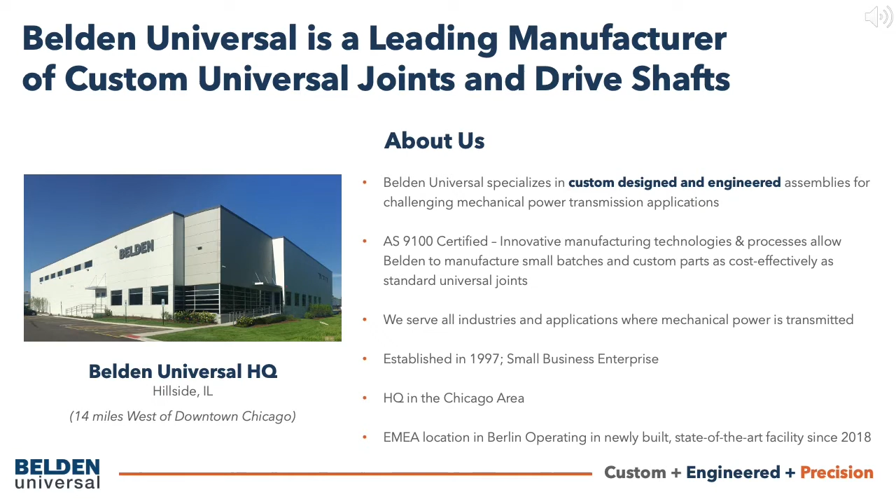Starting with the basics, what is a universal joint and why should you use this type of coupling? Universal joints are a type of shaft coupling used to transmit torque and motion between shafts with misalignment. Ideally, input and output shafts should be perfectly aligned. In practice, displacement during operation, for example due to a technical restriction or vibration, is often unavoidable.

These misalignments can be overcome with a well-selected universal joint or driveshaft. Universal joints can be found between motors and end effectors or gearboxes where other couplings are not an option, or where the characteristics of couplings alone do not suffice due to angular or parallel misalignment or other demanding operating conditions.

Let's examine the different power transmission conditions that would require a universal joint. If angular misalignment is greater than 5 degrees, a universal joint may be the only viable coupling option. This can be the case if the motor cannot be installed very precisely, or if the motor moves during operation or after installation. Sometimes the motor has to be placed at a higher angle to the outbound shaft due to other factors.

Single joints can operate at up to 45 degrees, and double joints and telescoping driveshafts can operate at up to 90 degrees. Parallel misalignment often requires a double joint or a telescoping driveshaft. As an example, sometimes the motor cannot be added in line with the outgoing shaft because there is no room, so it is plugged underneath or above the direct line of the shaft.

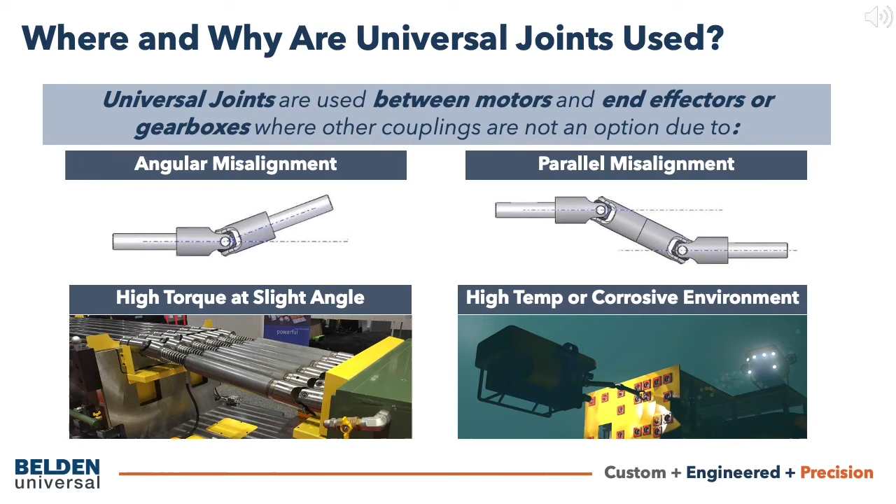Universal joints usually consist of two yokes, also known as forks, and a central cross-shaped element. When a cross is used, there are typically roller bearings or bushings required to install the cross. If the cross is built from a block and pins, there are ways to avoid bearings or bushings, but they can be added as well.

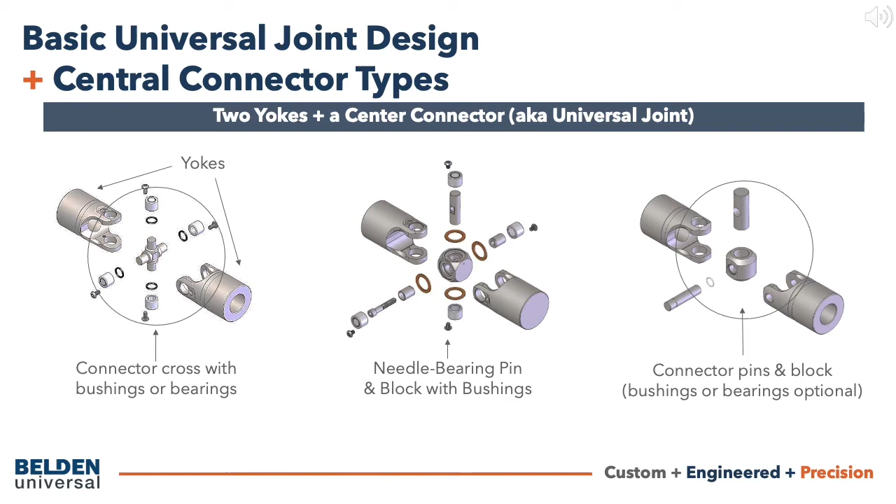A cross and roller bearing design is shown on the left. You can see a pin and block design on the right. There are also ways to add roller bearings and bushings to a pin and block design, as shown in the middle of your screen. The contact surfaces between the yokes and the central connector are what transmit the torque and motion, and therefore must carry considerable loads.

The design and type of connection in these spots are critical for optimizing the performance of a universal joint. These spots are called bearings. There are two major types of bearings for a joint: plain bearings, also called friction bearings or bushings, and needle bearings, also called low friction bearings.

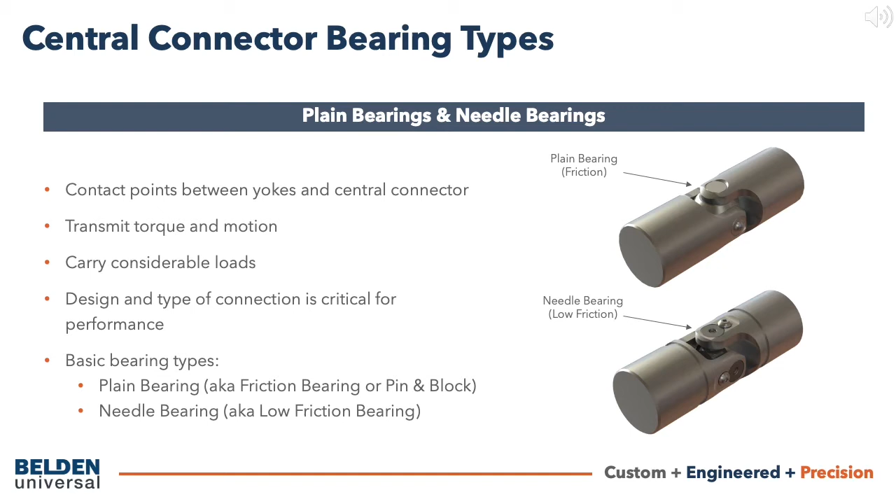Both plain bearing and needle bearing designs have their advantages. Plain bearings are usually simple, cost efficient, and can carry relatively high loads at low bearing speeds. However, they tend to be more difficult to lubricate, and heat generated by the friction can be a problem down the road due to wear or galling. Plain bearings can be adapted to the application by the materials used, such as alloys, stainless steel, and a combination of harder and softer materials like brass, bronze, or PTFE coatings.

The needle bearing design generates less heat and therefore can operate at a higher RPM, but at lower loads. They can also be sealed and permanently lubricated.

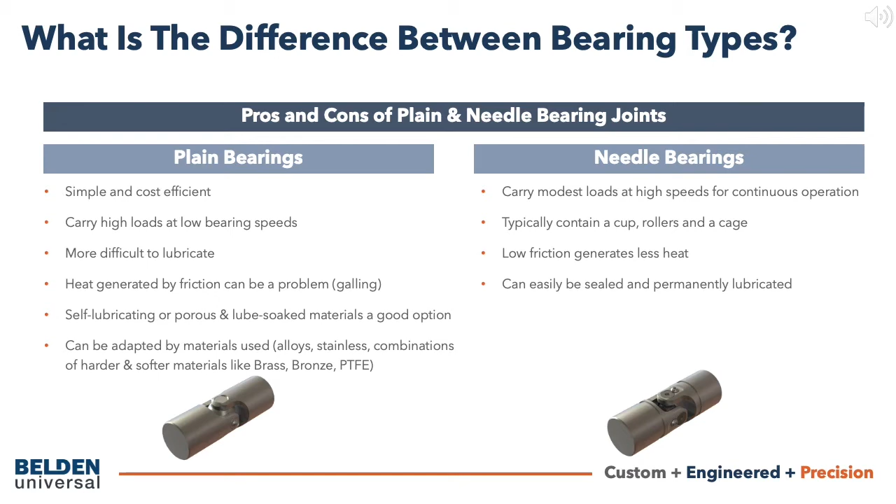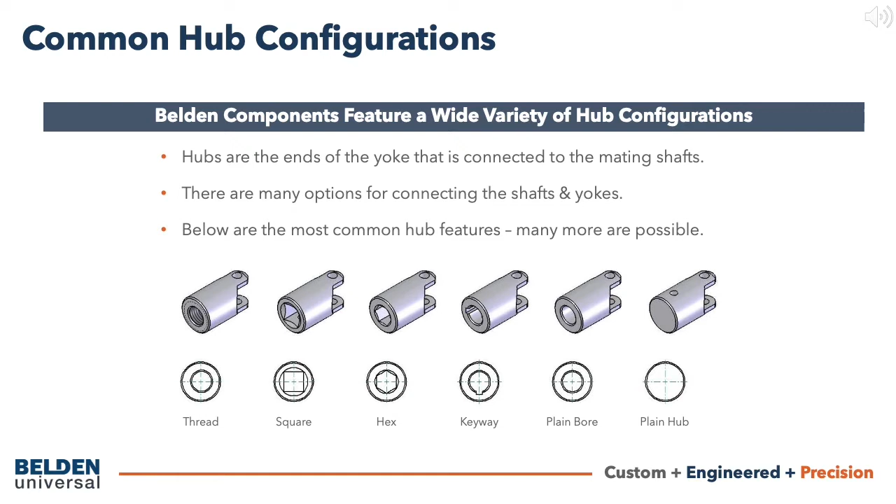Once you've identified the best bearing design needed for your application, there are many options to choose from for connecting the shafts to the yoke of the joint. The ends of the yoke that connect to the shaft are usually referred to as hubs. Some of the most common hub features are shown here, but there are many other variations and additions possible according to each application requirement. The next two slides show some of the specialized hubs we have created to meet customer needs over the last few years.

The assemblies you see on the top left and top right offer female bores with a spline on the outside hub. The top left assembly features a male shaft on one end and has been turned down to a smaller diameter, while the other end is a flange connection. This assembly was used to steer an unmanned robotic transport vehicle.

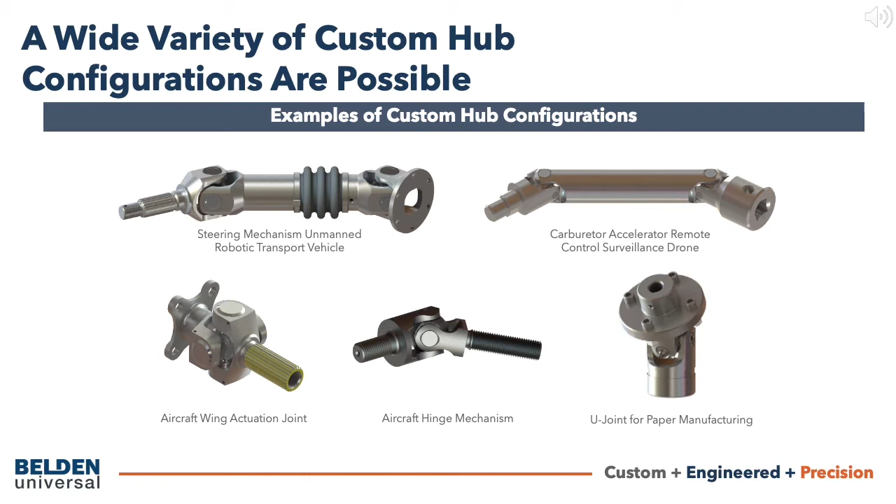The assembly on the bottom left is a joint used in aircraft high-lift actuation systems. The assembly you see on the bottom right is used in paper manufacturing machinery.

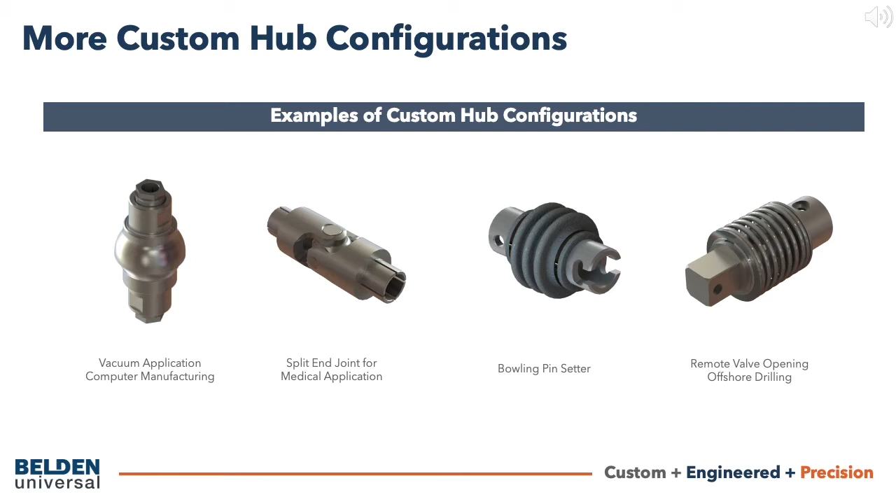Universal joints can be constructed as single universal joints or double universal joints. Different design subcategories include heavy-duty, high-strength, leveler, stainless steel, needle-bearing, and military standard or mil-spec. These base designs can be customized to meet the customer's specific coupling needs.

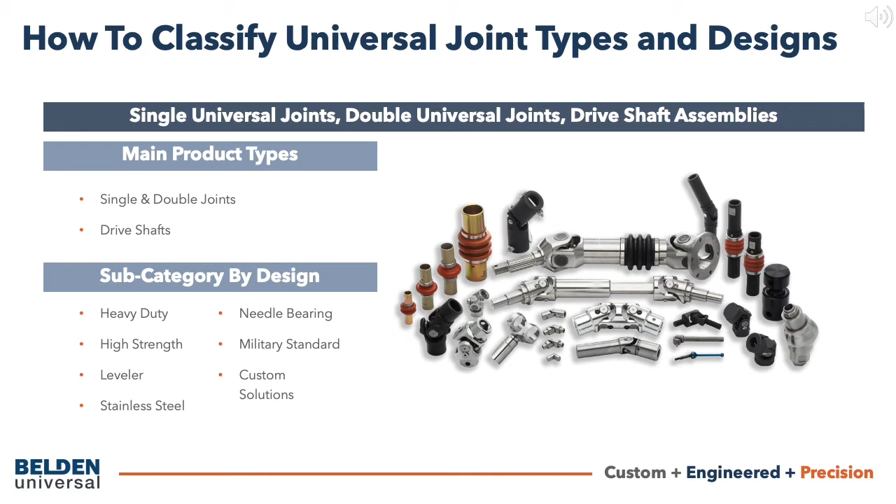Let's start with the different joint designs available for single universal joints. Single U-joints can compensate for angular misalignment of up to 45 degrees, depending on the size. They're available as needle-bearing or friction-bearing joints in any one of our friction-bearing design types: heavy-duty, high-strength, and leveler strength. All designs are available in our standard alloy steel, as well as a range of stainless and other materials. We will take a deeper look at the material options in another segment.

There are a range of standard hub configurations that we offer, but we can also provide custom hub modifications. Now, let's look at each of the base designs.

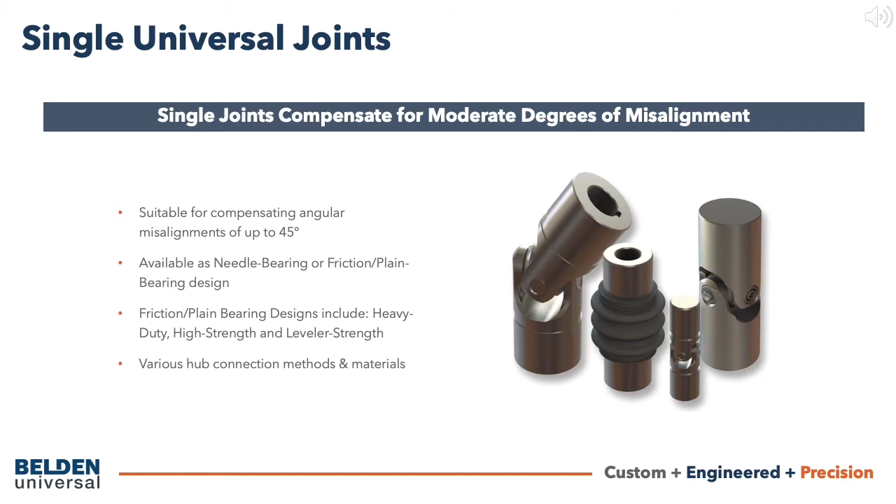Our first joint design is a heavy-duty joint. Heavy-duty joints are high-quality joints used for a variety of standard applications with moderate loads and RPM. They're constructed with a block, a large pin, and a small pin that is secured in place with a snap ring. Smaller joints in this design have the pins pinned in place rather than using a snap ring. They are made from high-grade alloy steel and have hardened and ground blocks, pins, and yoke ears. The hardening increases the strength of the components, but even more importantly, improves the bearing properties of the components at their contact faces.

Turning these into formidable friction bearings. This design is easy to assemble and can be disassembled.

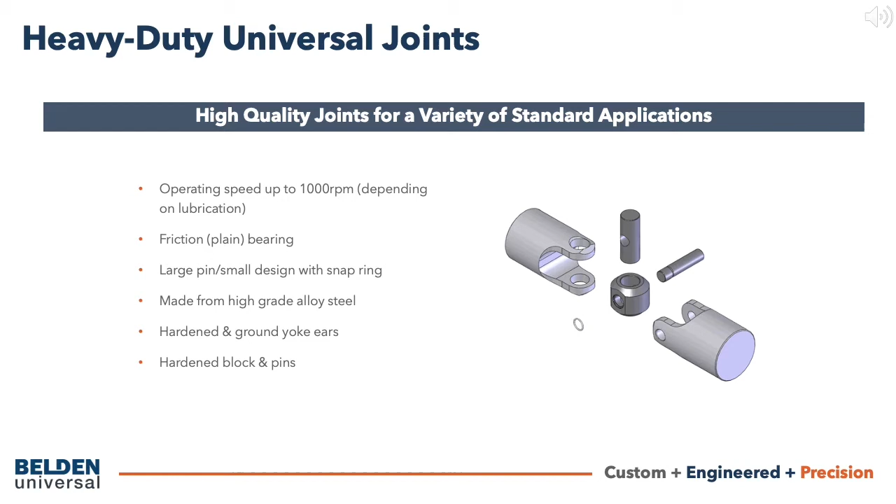High-strength universal joints are used for higher torque applications. They are also friction-bearing joints made from high-grade alloy steel. In this design, they feature a short pin, long pin construction, then are secured with a rivet.

The short pin and long pin design has the advantage of having the same size diameter pins for both axes, making them stronger, since the large pin small pin design typically ends up with an oversized large pin and an undersized small pin.

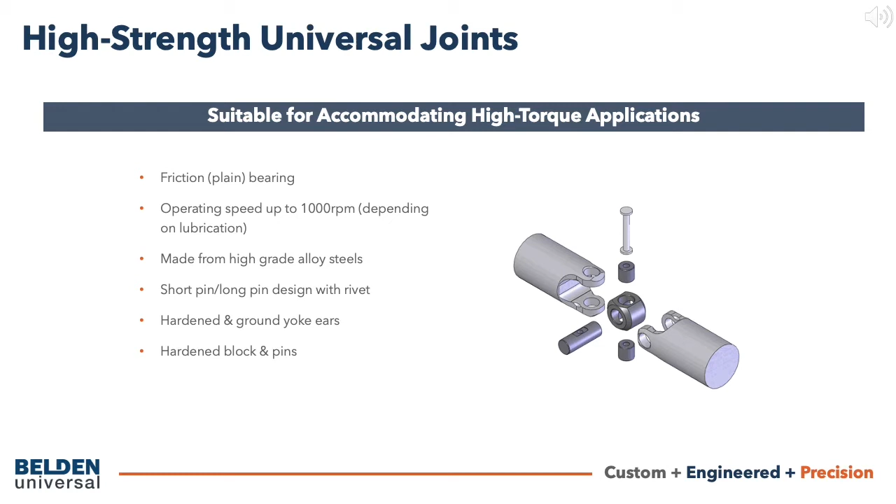Blocks and pins, as well as the yoke ears, are also hardened and ground as on the heavy-duty series.

Leveler-style joints are designed for extreme torque applications, often seen in steel leveling and metal processing equipment. Similar to the high-strength joint design, they feature a friction-bearing construction of the short pin and long pin secured with a rivet. Blocks and pins, as well as the yoke ears, are also hardened and ground.

The leveler design offers a reinforced yoke profile, making it our strongest design available, although in some cases this reduces the angle of operation. Additionally, a dry lubricant coating is added to the contact faces of the joint to assist the lubrication, or lack thereof.

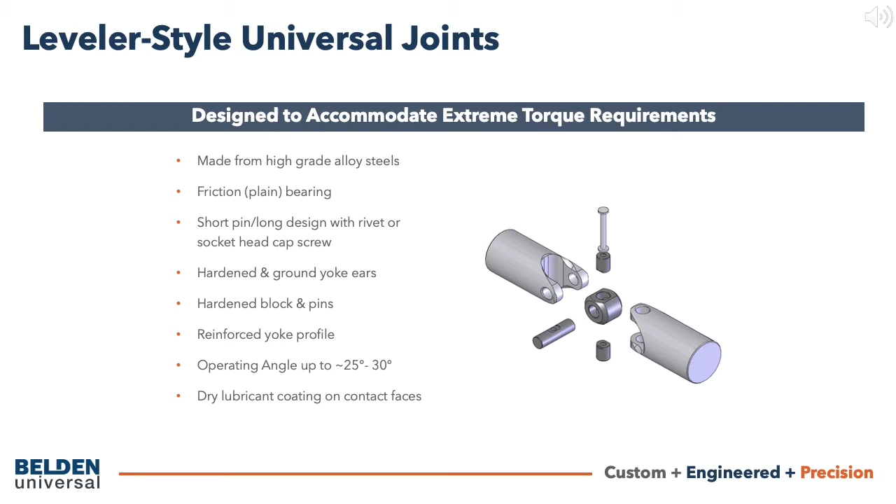High speeds can be problematic for joints fitted with plain friction bearings, even when the transmitted torque is low. Needle bearing joints are equipped with roller bearings that reduce friction and assist with minimizing and maintaining play and backlash over long periods of time.

They deliver a superior lifetime at continuous operations and higher RPM. They feature either a cross and bearing style, as shown here, or a pin and block design with needle bearings.

Yokes are made from high-grade alloy steel or stainless steel. The cross design is easiest to assemble and the most economical approach. It also has the smallest contact surface between the moving components, and thus less friction.

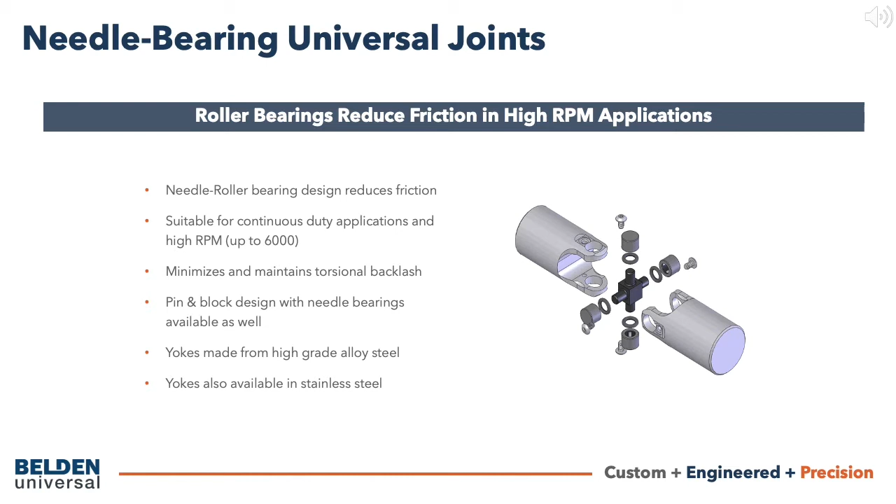In some applications, especially at high angles where high side loads are present, it can be better to use a pin and block needle bearing design to redistribute the side loads from the bearing cups to the yoke profile.

Belden is one of the only certified manufacturers of the military standard, or mil-spec, universal joints. These military standard joints are specified in regards to dimension and strength, and offer features like cadmium or zinc plating for corrosion resistance, along with protective boot covers.

In order to be QPL-listed, a government-approved manufacturer of these joints, an extensive range of tests has to be performed in authorized labs. The mil-spec universal joint is based on a high-strength leveler-style design.

They are made from high-grade alloy steel and components, and can be plated with either cadmium or zinc. These joints are tested and certified per military standards.

In the heavy-duty line, boots are packed with lubricant for extended life. Mil-spec joints and their semi-custom variants are commonly used in aerospace and defense applications.

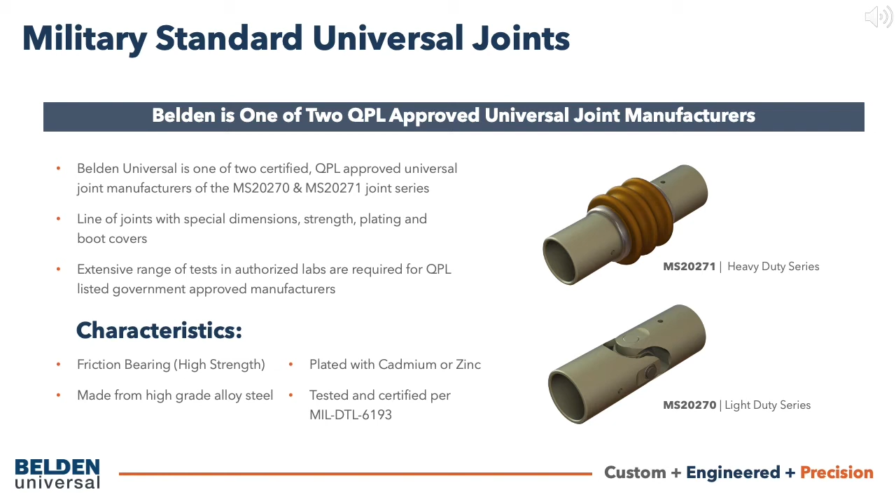Sometimes a single universal joint is not enough to compensate for all misalignment in a mechanical system, so a combination of joints, usually two, can help.

Double universal joints can be manufactured either by butting two single joints together, referred to as a double butted joint, or as a double joint with a double yoke in the center section.

Double universal joints can be constructed in all design types: heavy-duty, high-strength, needle-bearing, leveler, and stainless steel. As with most of our joints, double universal joints can be equipped with protective boots as well.

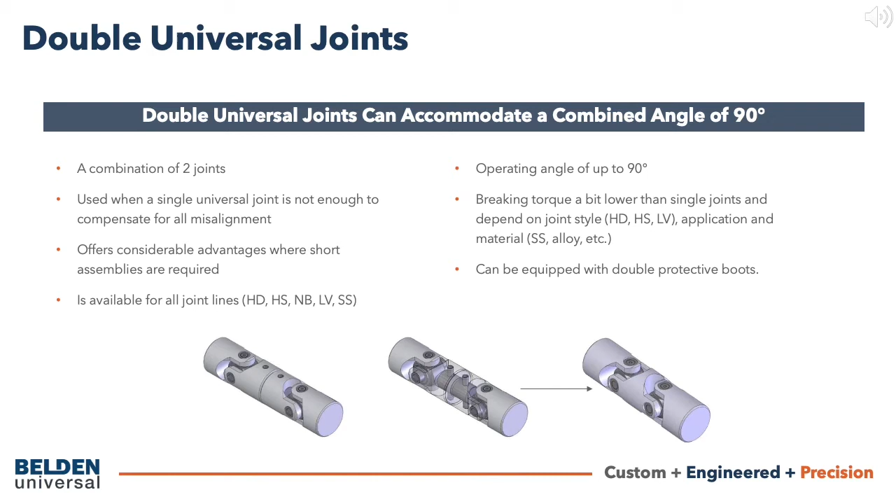Driveshaft assemblies are required for axial misalignment, or applications where axial movement occurs during rotational power transmission. The axial slide can also be used for easy installation on the assembly by compressing the assembly and sliding it into a connecting shaft.

Driveshafts offer flexible length as needed. Depending on the nature of the application, driveshafts can be constructed as axially free versus axially retained, to allow for the shaft to be fully removed from the sleeve or long yoke at the other end of the assembly. If constructed as axially free, it is recommended that the shaft and sleeve be marked to ensure proper phasing of the assembly when put back together.

If the assembly utilizes a spline shaft, one or two teeth can be removed to assist with phasing as well. Spring-loaded assemblies can be constructed and made per specification with preloads for a safe connection.

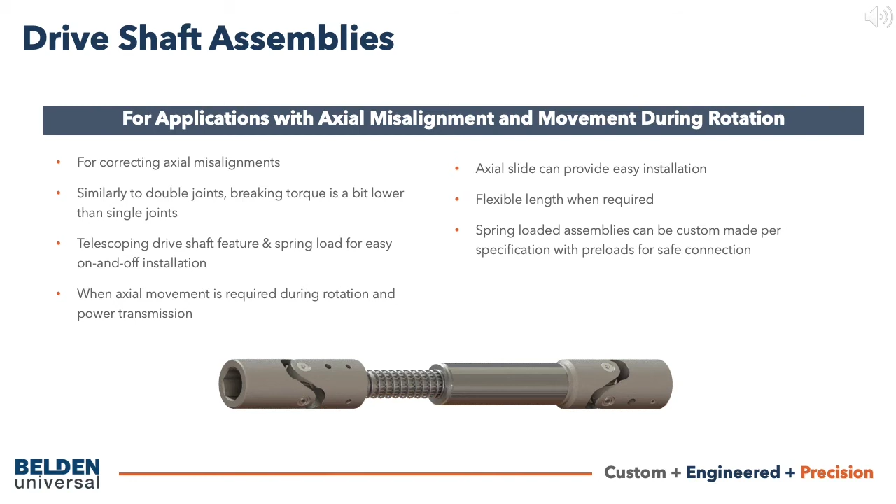Drive shafts, as well as double universal joints, can be operated with near constant velocity. That means a typical speed fluctuation between driving and driven shaft, present for single universal joints during a full revolution, is compensated. For this to happen, inbound and outbound yokes need to have the same angle, either in a Z or W arrangement.

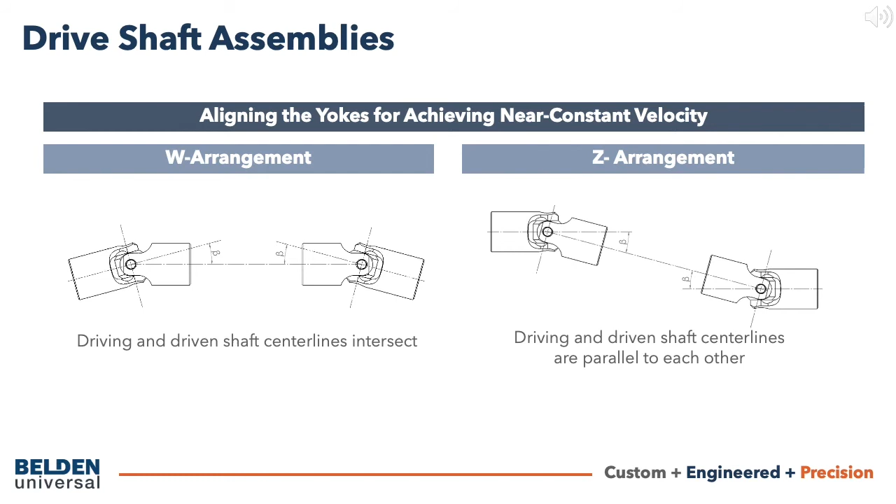One note of caution: even though driving and driven shafts are now at constant velocity, this is not true for the center. This is still fluctuating, which can cause problems at elevated speeds. This all depends on the size, torque, and length of the assembly, but our engineers are happy to assist with any specific application questions.

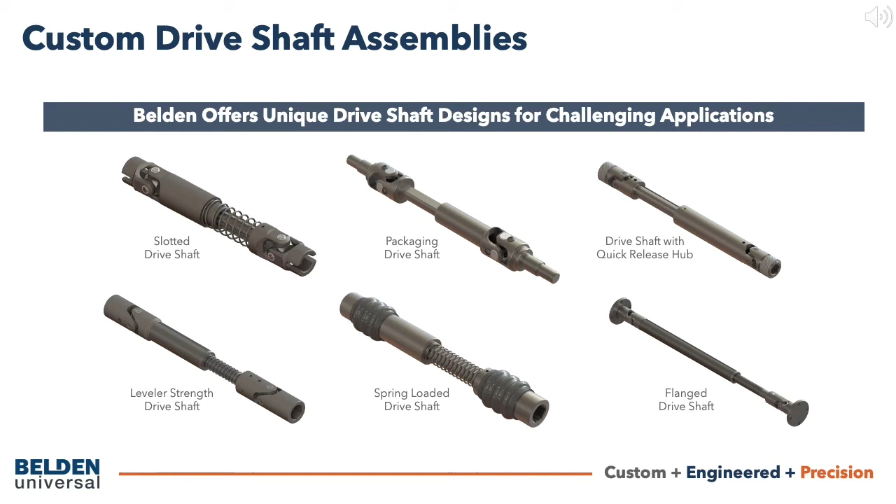The drive shaft in the top middle is used in packaging equipment and features male ends that are turned down with a square shaft that is not spring-loaded. There are numerous variations of how drive shafts can be constructed, depending on your application needs.

Most of our standard alloy yokes are manufactured from 1144 steel and selectively hardened. Other materials, such as 4142 steel, may be used depending on the universal joint size or series. Most standard alloy blocks and pins are manufactured out of hardened 8620 steel for increased strength, durability, and performance.

Our standard stainless steel yokes are manufactured from 303 stainless steel. Standard stainless steel blocks and pins are manufactured from hardened 416 stainless steel to prevent premature galling and wear. All components are precision machined, selectively heat treated where applicable, and manufactured to close tolerances.

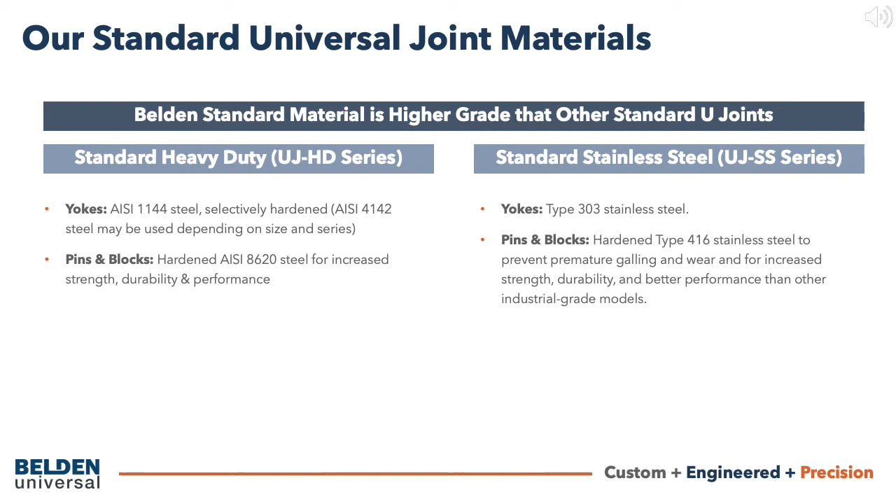Special applications and custom solutions may require unique materials to deliver higher strength, improved durability, corrosion resistance, and other qualities. We offer a variety of stainless steel alloys along with aluminum, bronze, and brass alloys, duplex stainless steel, and super alloys such as Inconel, titanium, and more.

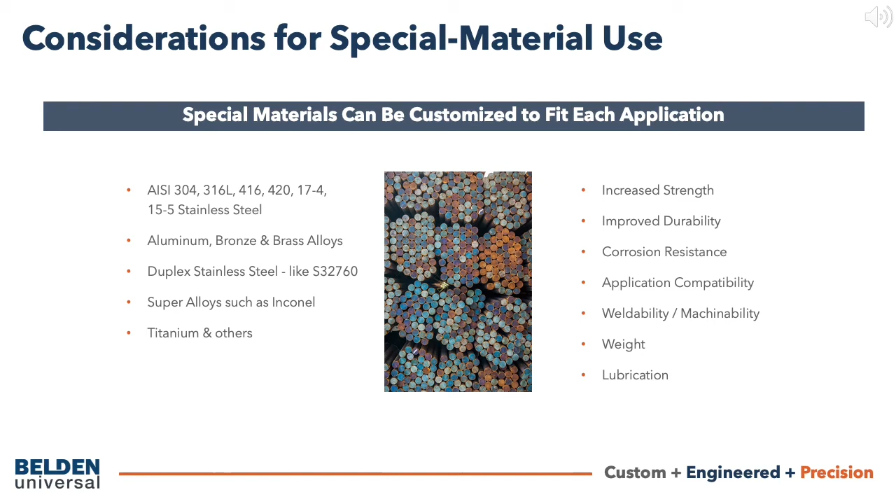Besides the choice of materials, joint component corrosion resistance and required operating characteristics can also be achieved or improved by applying special coatings and surface finishes. These finishes can be applied either in specific areas or to the entire joint. Some common coatings and surface finishes include cadmium, nickel, zinc, black oxide, and electropolish, just to name a few.

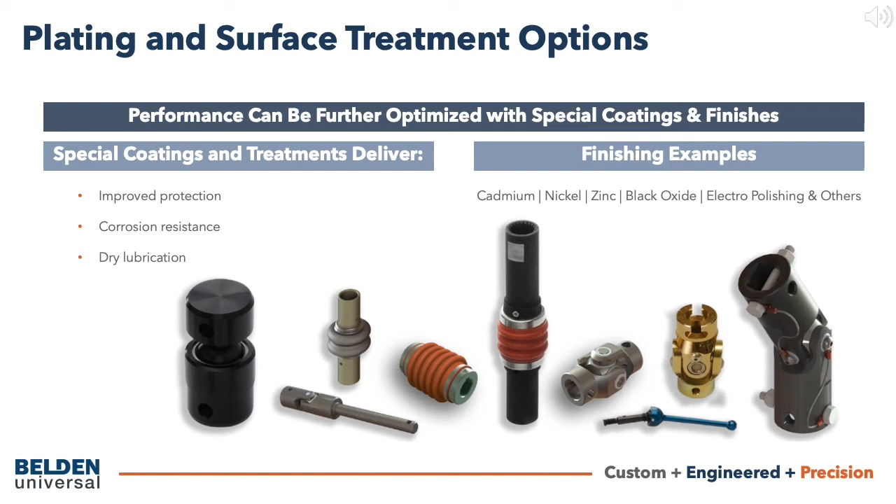In situations where continuous lubrication is difficult or impossible to supply, or if the universal joint assembly is going to be operated in an atmosphere polluted with chips, dirt, acids, or other corrosives or abrasives, it is highly recommended that protective boots be added to the assembly.

Boots play an important role in protecting the universal joints. Because the boot inhibits lubrication loss, it can be used to keep a friction-bearing joint fully lubricated. Proper lubrication will considerably prolong the useful life of a universal joint.

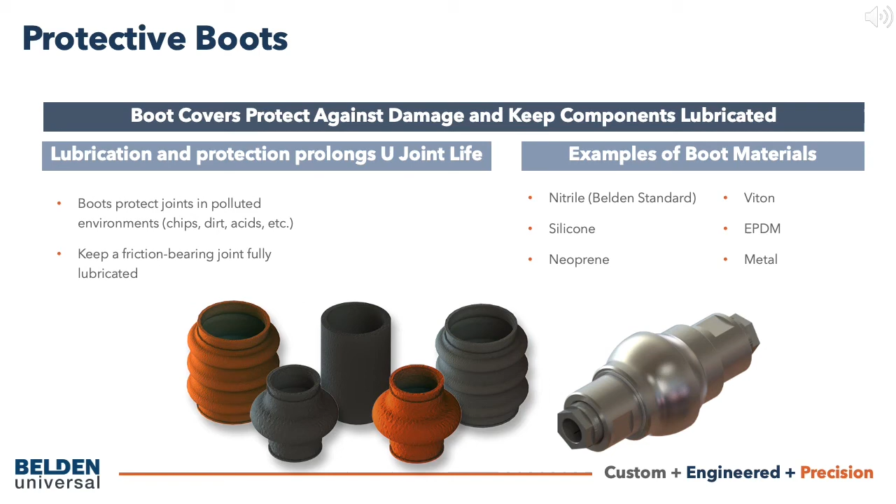Boot materials and examples include nitrile and silicone, which are Belden standard, as well as neoprene, Viton, and EPDM, which are available upon request. Even metal covers can be designed, as you can see at right.

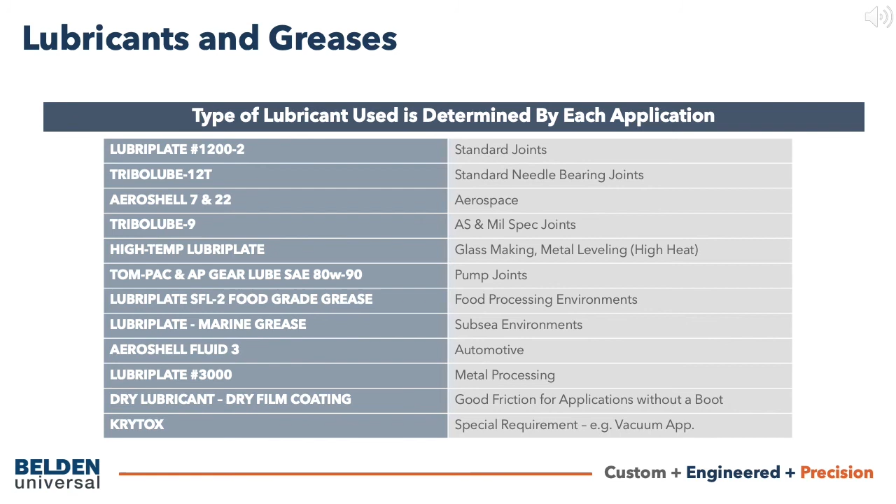There are a wide variety of lubricant types suitable for various operating environments. Project requirements or certifications will determine the kinds of lubricants or grease to be used. These are just a few examples of lubricants and their applications. For example, food-grade grease conforming to FDA regulations can be used for food processing, marine-grade grease for naval applications, and aerospace-grade grease for a variety of aerospace applications.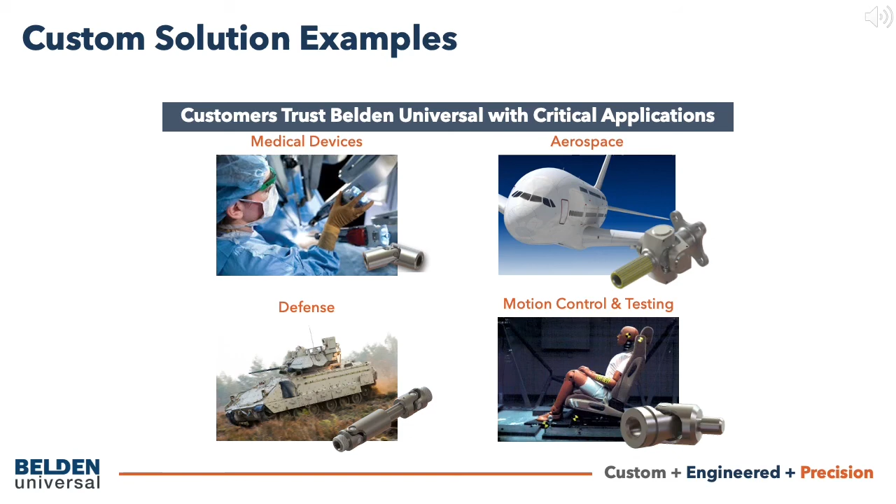Now we'll get into a few case studies from the automation and metal processing industries.

This first case study presents a universal joint solution developed for food production automation equipment, in this case a pick-and-place robot. A customer was having a problem with a standard cross and needle bearing joint during the washdown phase on the automation equipment of this food application.

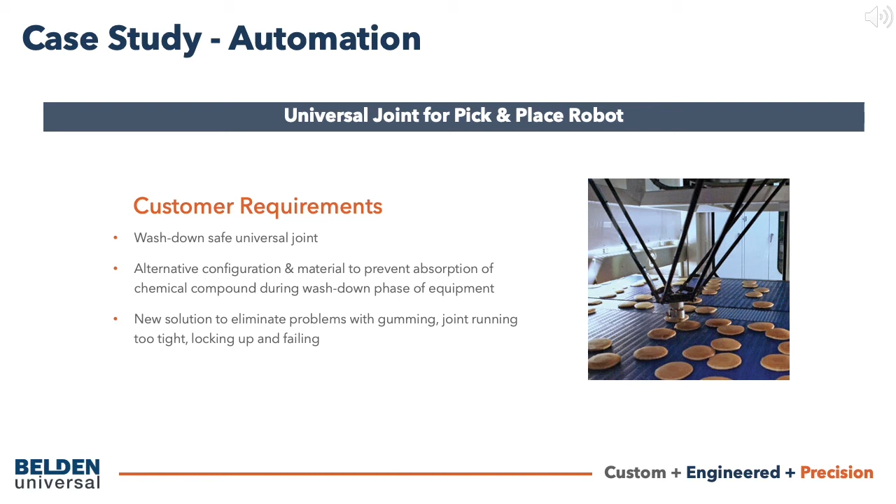The needle bearing joint would absorb the chemical solution used twice daily to clean and sterilize equipment. Once the alloy bearings absorbed the chemical compounds, gumming would occur, causing the joint to run tight, lock up, and fail.

After discussing operating conditions and product specifications with the customer, Belden Universal developed a precision-engineered pin and block joint completely out of stainless steel with composite bushings, which provided a corrosion-resistant, lubricant-free, low-friction plain bearing joint.

The low-friction pin and block plain bearing design enables a higher torque capacity than the friction-bearing joint, with the needle bearing's ability to continuously operate at higher speeds with less wear and even less backlash.

The composite bearings can handle harsh chemicals found in the cleaning products used by the customer, allowing the joint to operate freely and cycle for a longer duration before any precision was compromised.

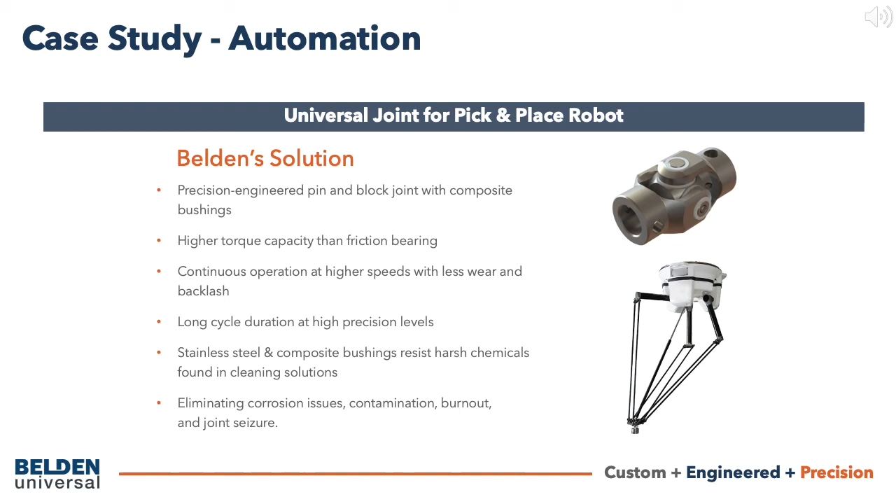Belden Universal's solution provided the customer with a completely washdown safe universal joint, eliminating corrosion issues, contamination, burnout, and joint seizure. This case study highlights the importance of customization in order to satisfy all aspects of operating criteria.

A customer's high-speed roll forming machine operated with a driveshaft assembly containing a traditional pin and block universal joint. The speed of the application caused the components to overheat and posed a considerable fire hazard.

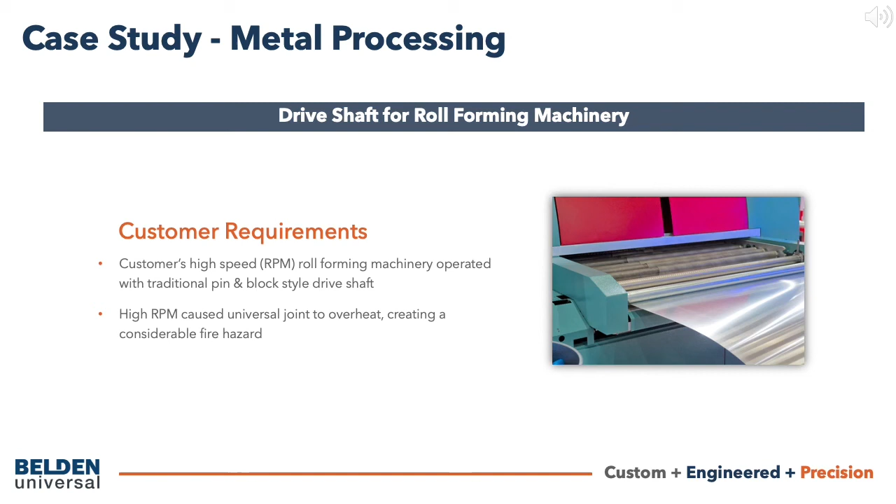To address the problem of overheating, Belden Universal's engineering team recommended replacing the pin and block component of the driveshaft assembly with a re-lubricatable forged cross and needle bearing style joint.

Cross and bearing configurations don't present as much friction on the surface of the yoke, therefore significantly reducing the issue of heat generation. However, as was the case in this example, the swing diameter of a standard cross and bearing joint is often too large and doesn't fit flush with the other existing components.

To resolve this problem, Belden's design team modified the yoke tips of the original driveshaft to align with the larger outside diameter of the new cross and bearing component.

The assembly was manufactured from high-grade alloy steel. The yoke ears were hardened and ground for increased torque capacity. A special telescoping spring loading feature is provided for easy on and off installation.

The array of customization resulted in a high-performance, low-maintenance driveshaft optimized for speed, torque, and available space, as was appropriate with the customer's metal processing machinery.

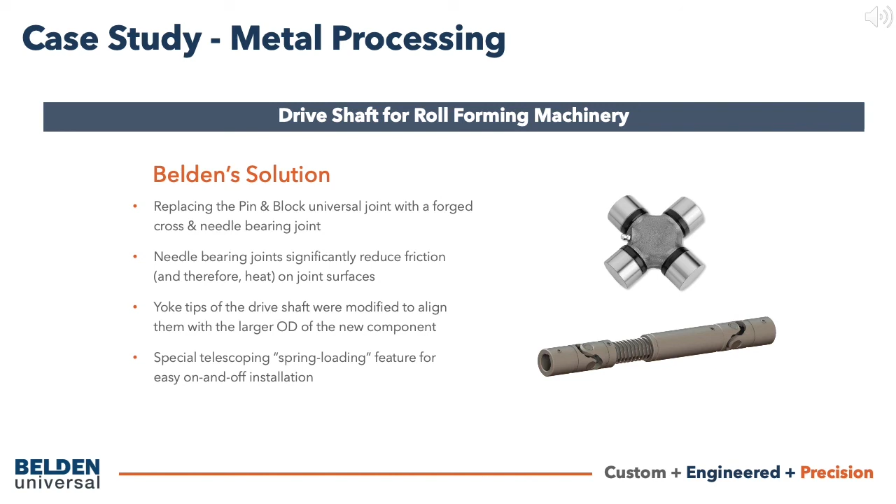Some of our distribution partners may be wondering, where do I find universal joints in my customer's equipment? In the next few slides, we'll go over a collection of examples to give you some ideas on where to look for U-joints in a mechanical system.

Universal joints are common in food and beverage industry applications, such as these three examples from a conveying system, a bottle filling and cleaning line, and a labeling line.

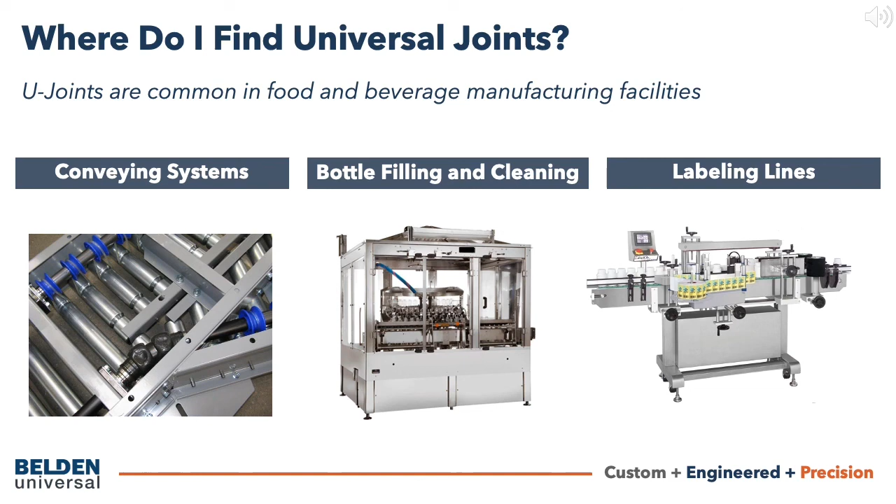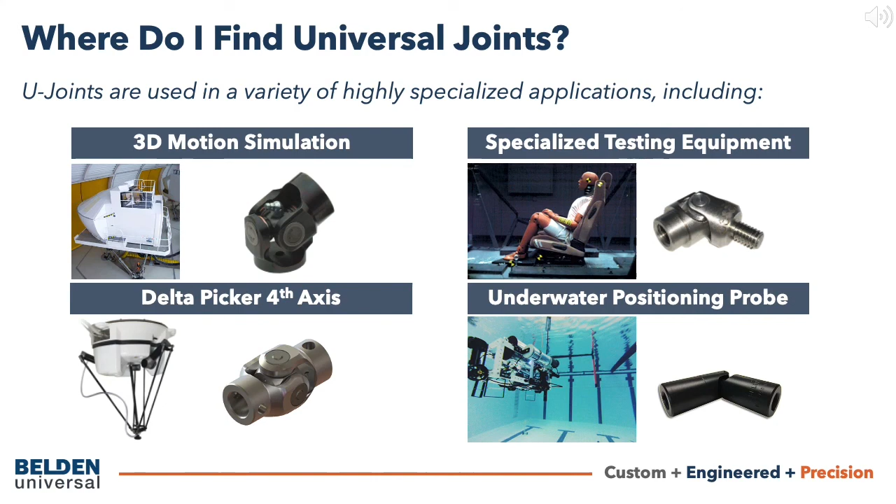A few more specialty applications for you: 3D motion in a flight simulator platform, specialized testing equipment such as crash test dummies, automation and robotics platforms such as a Delta Picker robot, and subsea remote operating vehicle platforms.

This list gives you a selective, but not exhaustive, list of common machinery that requires universal joints or specialty drive shafts. Our joints are widely used in aerospace, agriculture, automation and robotics, drilling and tapping, food and beverage, industrial machine tools, energy, material handling equipment, military and defense, medical devices, metal processing, packaging and conveying, printing, and marine applications.

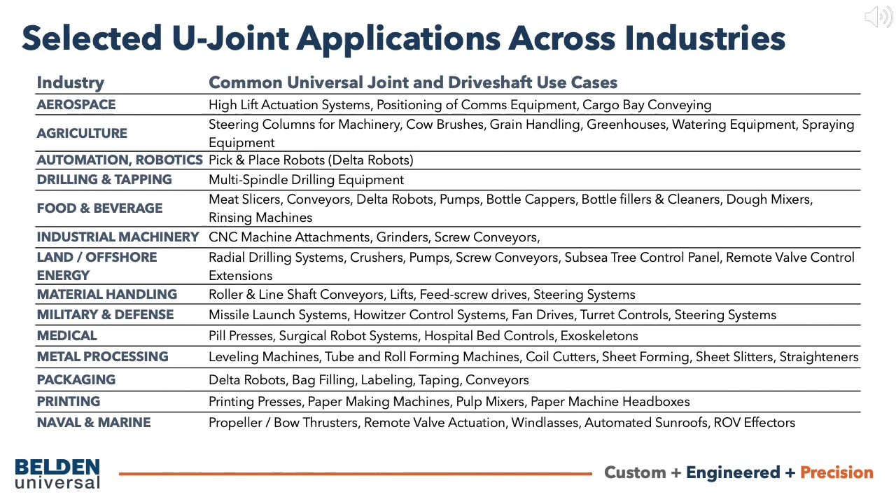If you have questions or require more information on your specific application, please do not hesitate to contact Belden Universal's team of sales and application specialists.